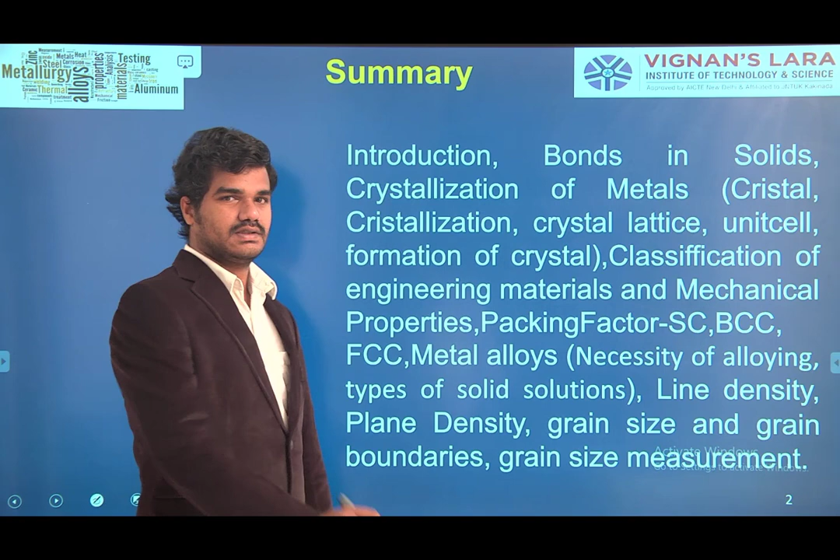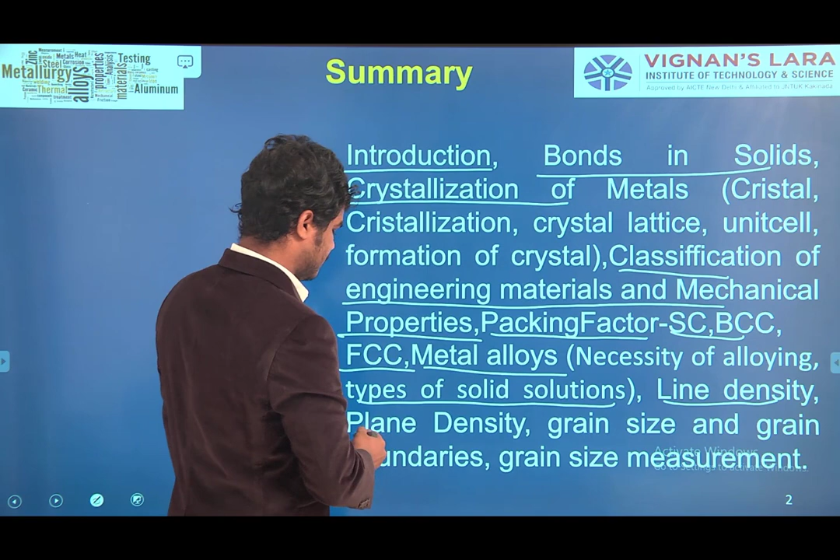So far we have covered these topics in this subject: introduction, bonds in solids, crystallization, classification of engineering materials and mechanical properties, packing factor for simple cubic, body centered cubic, face centered cubic and HCP, metal alloys and necessity of alloying, types of solid solutions, line density, plane density, grain size and how to calculate grain size, and grain boundaries. So these are all the topics so far we have covered.

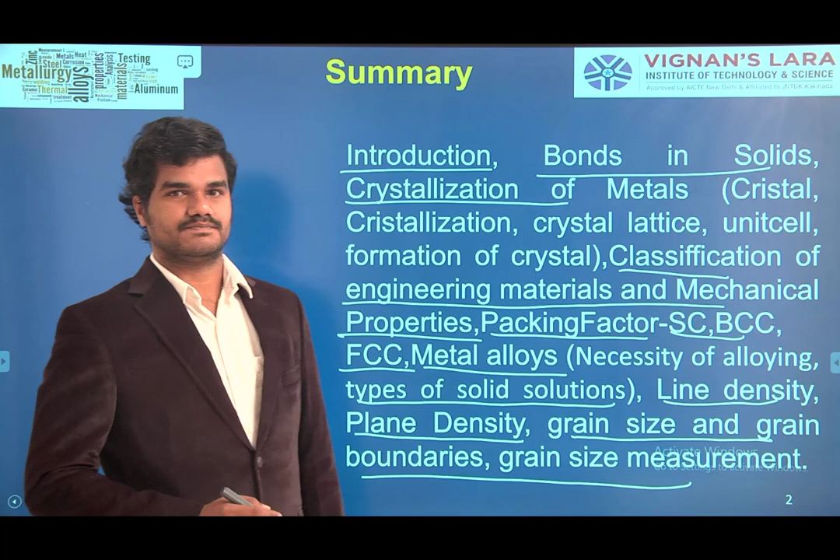Today let us discuss about imperfections, as we are in the first unit, structure of metals and constitution of alloys.

Before discussing imperfections, we have to recall the topics we discussed earlier, that is solidification and how the crystal formation happens. During the crystallization topic presentation, I told how the crystal formation happens. It forms in 3 steps: one is saturation, second is nuclei formation, and nuclei growth, leading to crystal growth. So in these 3 steps, crystal formation happens.

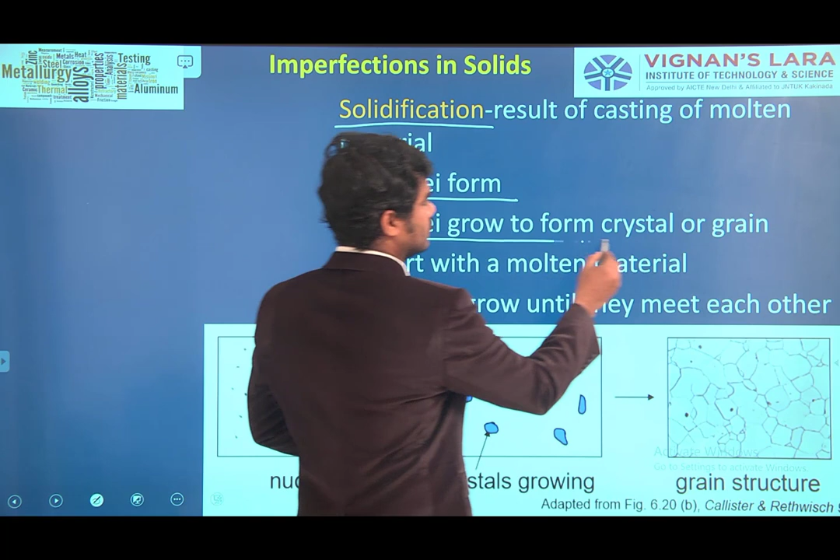During solidification, many aspects and things will happen. As I told, nuclei formation will happen, and nuclei growth to form crystal or grain will happen. So for the formation of any metal, solidification is must and should. Solidification means bringing the molten material into the solid state by cooling, by applying different environmental conditions.

During the solidification process, formation of crystal growth and arrangement of atoms happens, and because of all these factors, there will be some voids. There will be some defects in the metal. Discussing about those voids or defects, how they form, how many types of defects are there - that is nothing but the topic of imperfections.

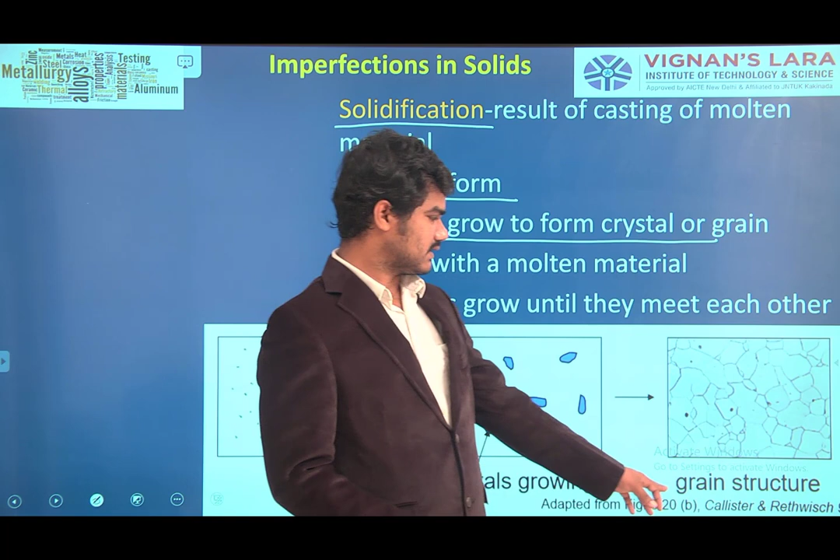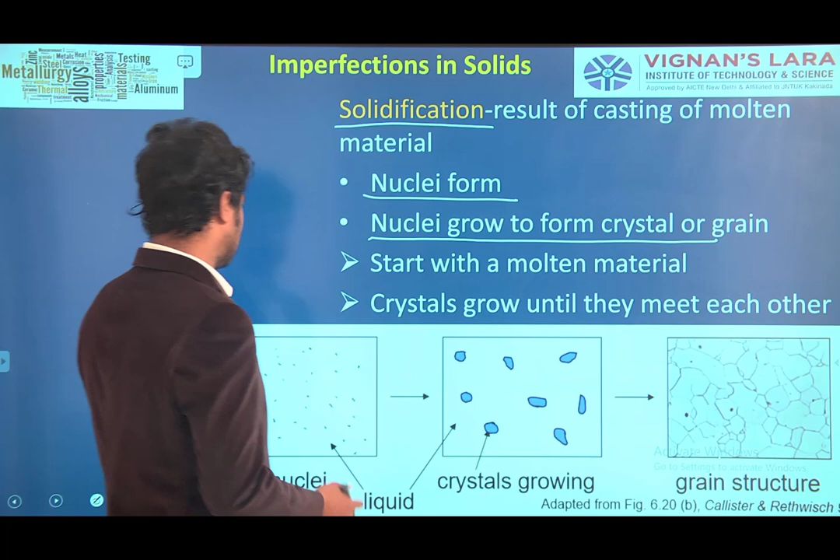As I told, crystal growth will happen through nuclei formation, crystal growing and grain structure. In the last presentation I told you that crystal growth and crystal grain structure can be seen in a microscopic structure. This is one microscopic picture of some metal. I am just recalling the topics we already discussed. Crystal formation happens in 3 steps: one is saturation, nuclei formation, and crystal growth.

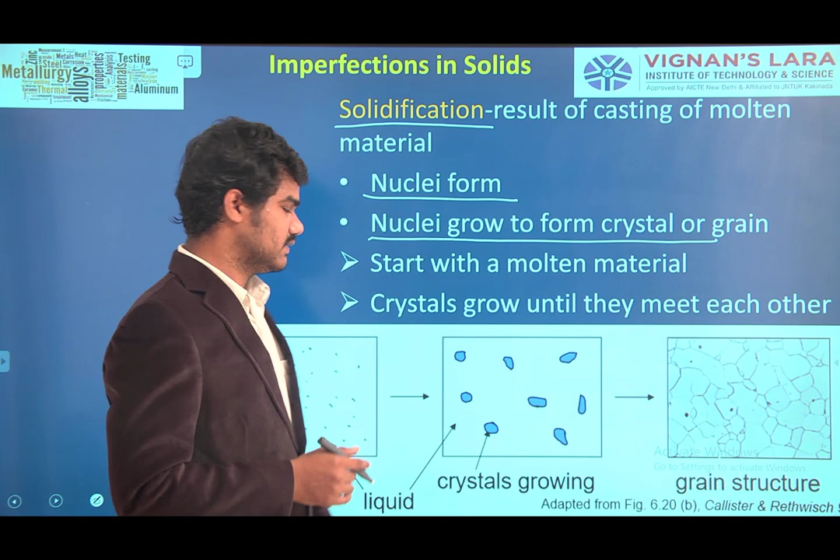Once this crystal growth happens, the grains - crystals are nothing but grains - grain formation will happen and grain boundaries will be there. So those grains which are formed during solidification are of 2 types. One is grains can be equiaxed, meaning roughly same size in all directions.

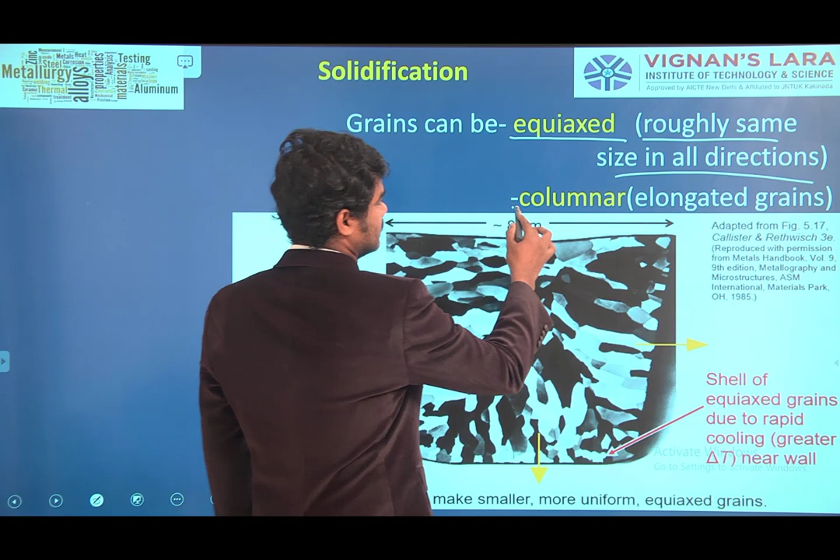During solidification, crystal formation or grain formation is happening, but the grains need not be in the same size and shape. So some grains are in the same size - the grains which are in same size come under equiaxed grains. The second type is columnar grains, or elongated grains. So during solidification, some grains are elongated, and those grains come under columnar grains.

In one picture, all these representations happen. This picture shows solidification, where some materials adding will be there, but that we are not discussing here. So this is one picture that represents, after solidification, the different types of crystal which are equiaxed and which are columnar.

Now about heat flow. During solidification, heat will release from the molten metal or molten material, which is in a very hot state, when it becomes complete metal. Molten means it is in liquid state - for example, if you have gold and want to make it into an ornament, first you have to melt it. So for every metal it is the same case. When it is in molten state, which is very hot, heat will release from the molten material. So that's what heat flow means.

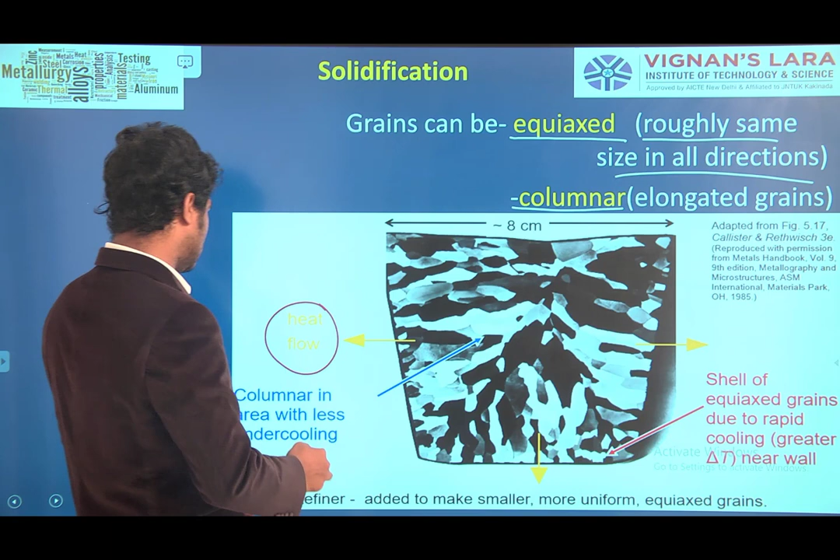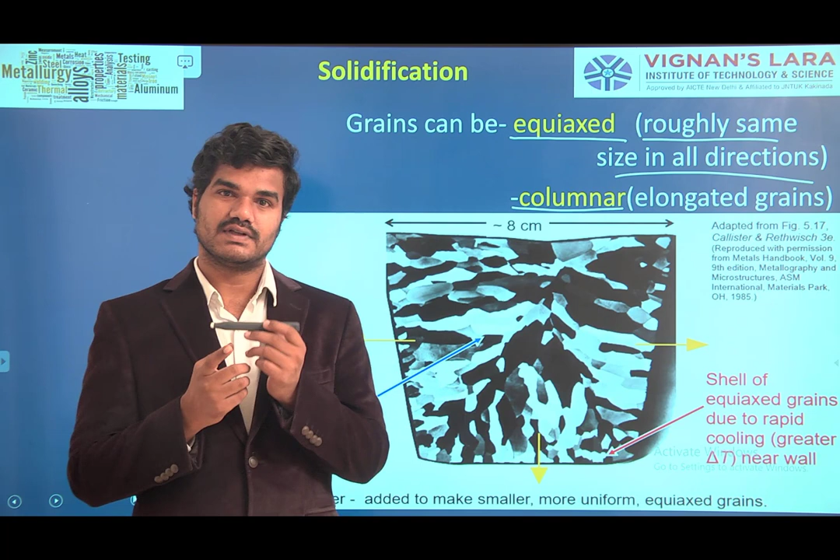Heat flow. Columnar grains form in the area with less undercooling. Suppose this is a body, a molten material, where the rate of cooling is very less at the center of the body. In the surrounding of the molten material, it will be in contact with the atmosphere, so rate of cooling is more at the edges and surface. But inside, at the center of the material, rate of cooling is very less. At that area, columnar grain formation happens.

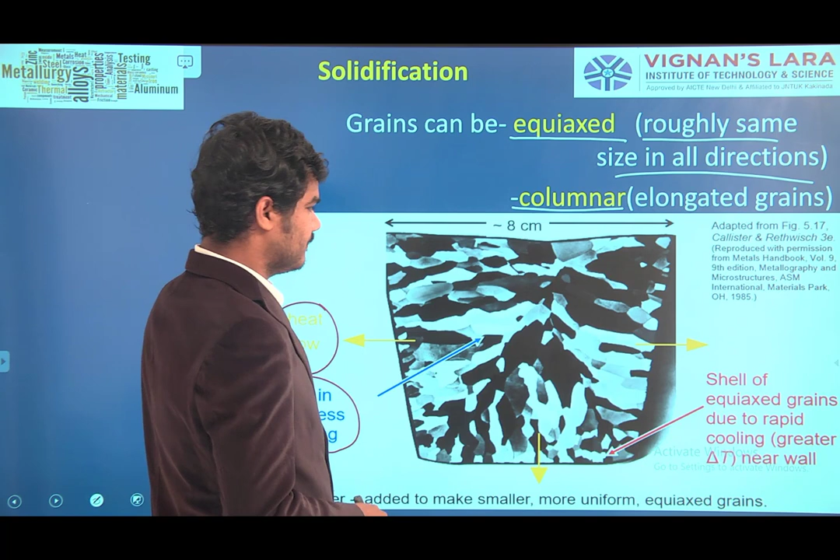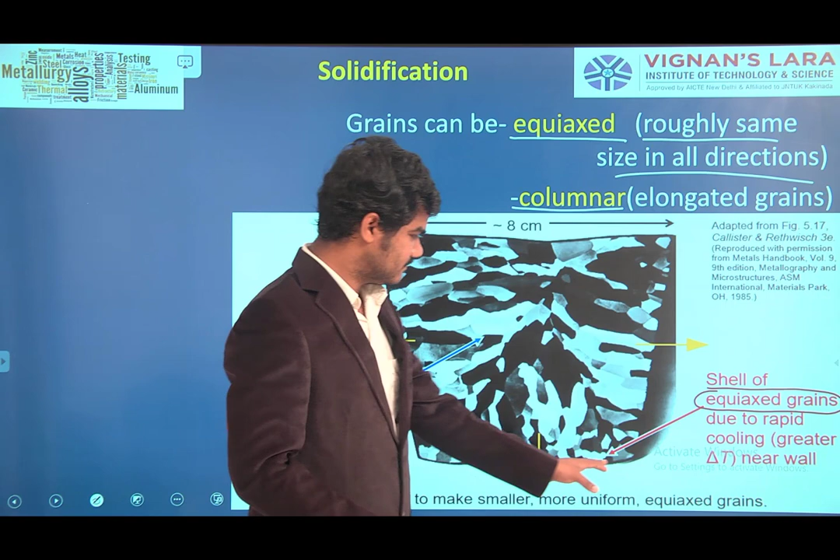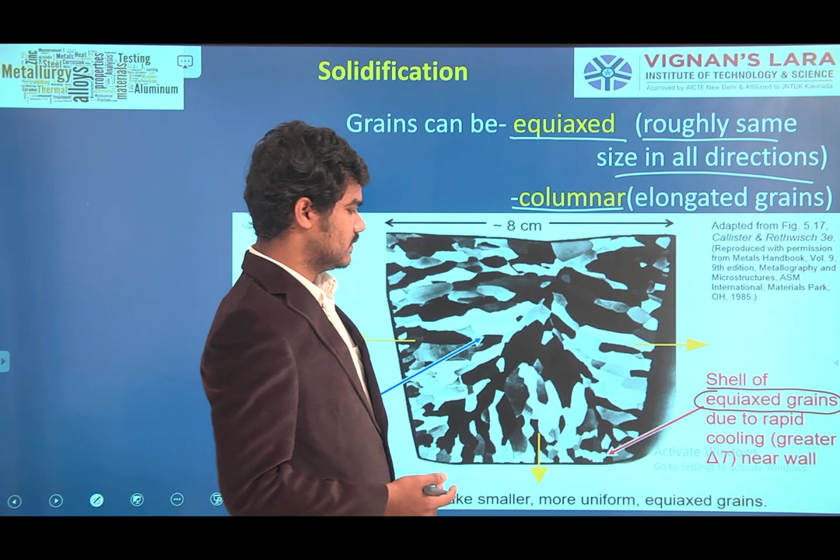Columnar grain formation happens. Where do equiaxed grains form? Equiaxed grains which are of the same size form where rapid cooling takes place. Where does rapid cooling take place? At the edges, at the edges or on the surface. At the surface, rapid cooling takes place, so where rapid cooling takes place, equiaxed grains will form.

During solidification, two types of grains will be formed: equiaxed and columnar grains. Equiaxed grains form where rate of cooling is more, meaning at the surface or edges of the molten material. Columnar grains form where rate of cooling is very less, that means at the center or inside the material, which is not in contact with the atmosphere.

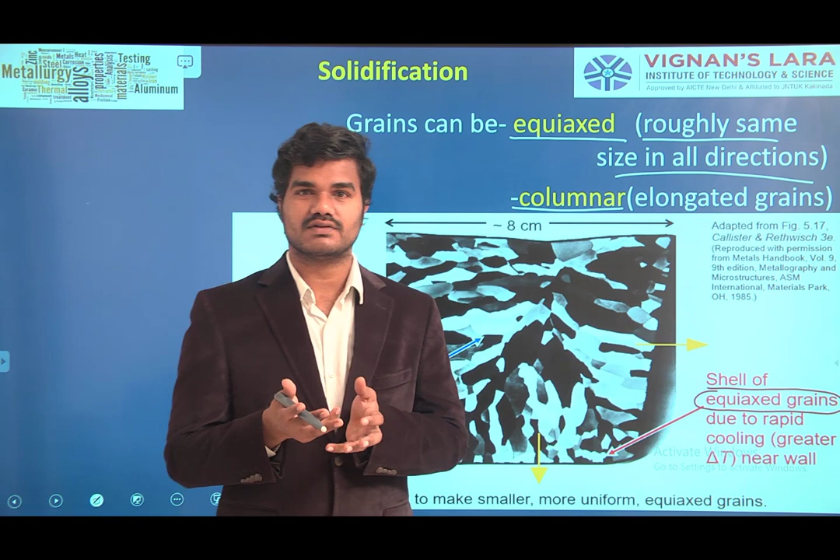In the topic of imperfections, why are we discussing all this about grains? Due to the formation and arrangement of grains, these imperfections will be formed. For that purpose, we are discussing the grains topic here also. Let us go into the next slide.

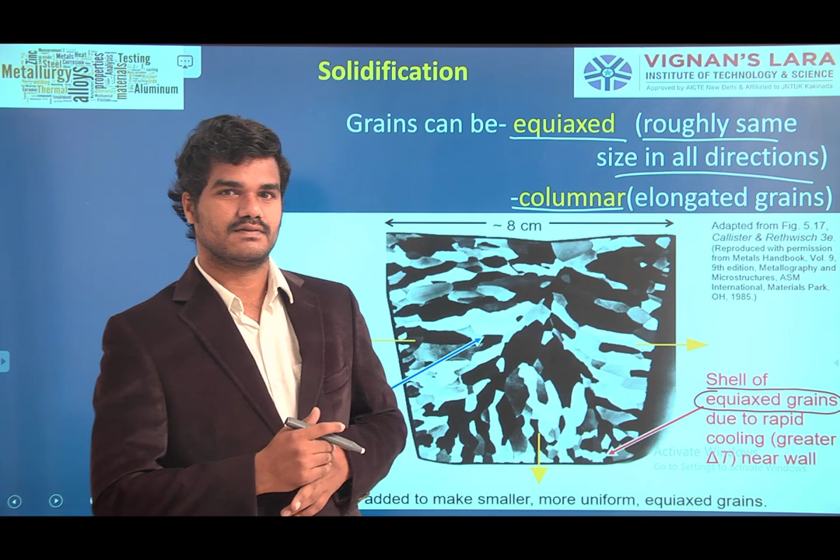Imperfections in solids. Imperfections will be there not only in solids, in metals, but in polymers, ceramics, everywhere imperfections will be formed. But here our concept of discussion is about metals, solids, metal solids.

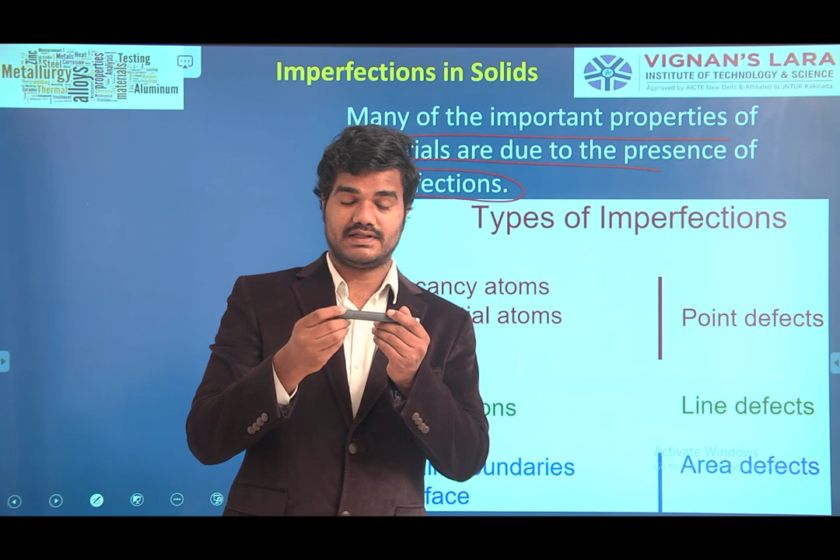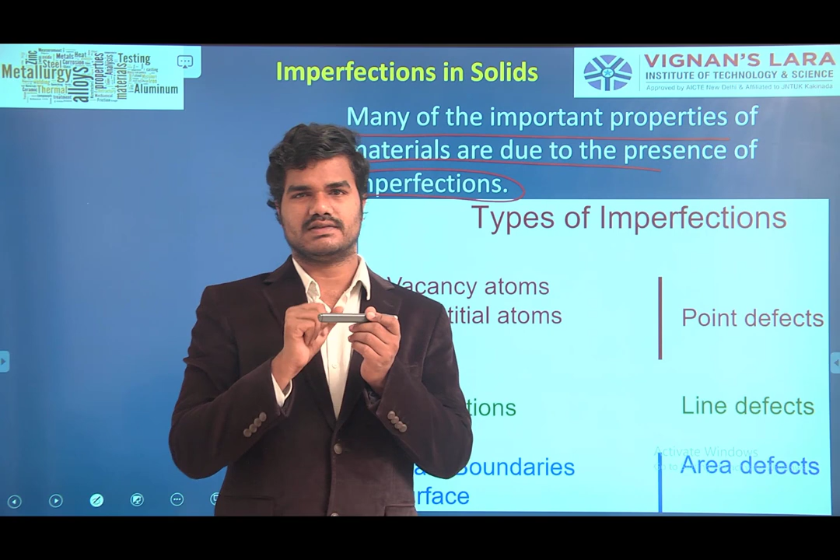Many of the important properties of the material are due to the presence of imperfections. If a particular material has high strength, those imperfections are less. So if the imperfections are very less, strength and some other properties are more. So many properties depend on these imperfections inside.

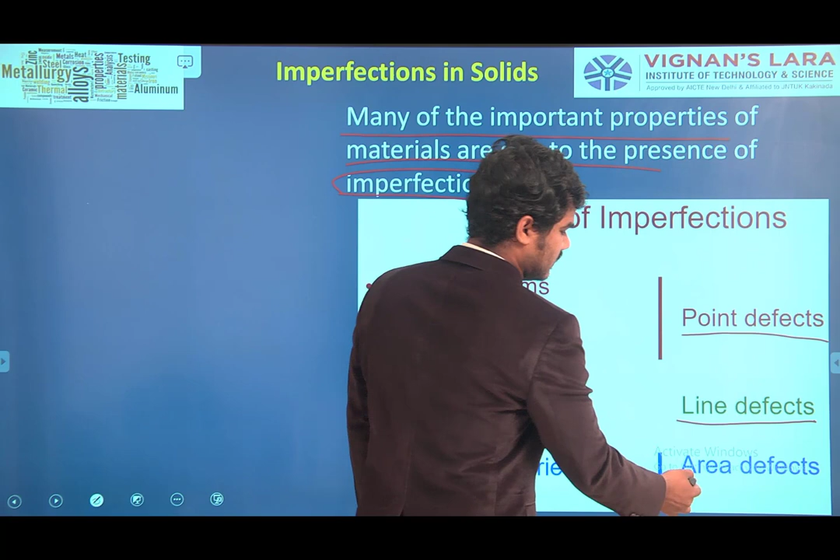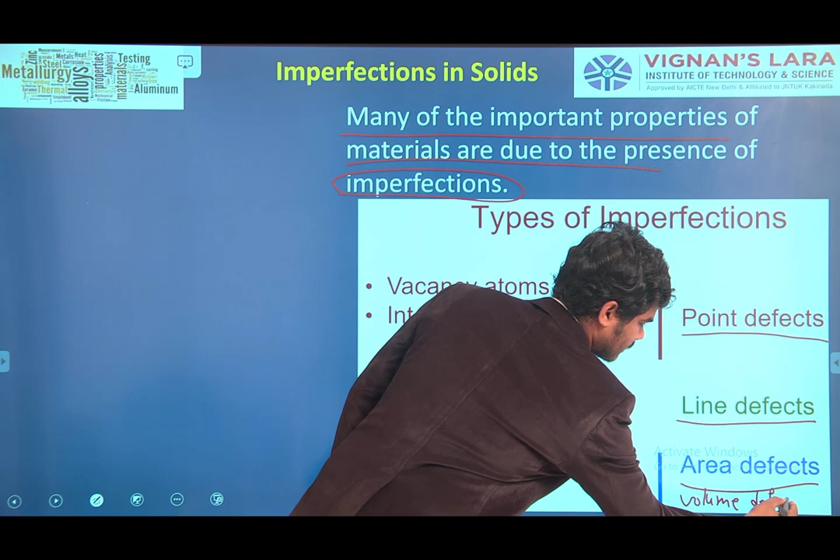Let us see what imperfections are. Those imperfections are classified into 4 types. Imperfections are also nothing but defects. Those defects are classified into point defects, line defects, and area defects. Point defects, line defects, area defects, and volume defects also there, which is not shown here. Volume defects also there. Let us discuss in detail about these defects.

What are point defects? What are line defects? What are area or planar defects? What are volume defects? How do these form? How are they again classified?

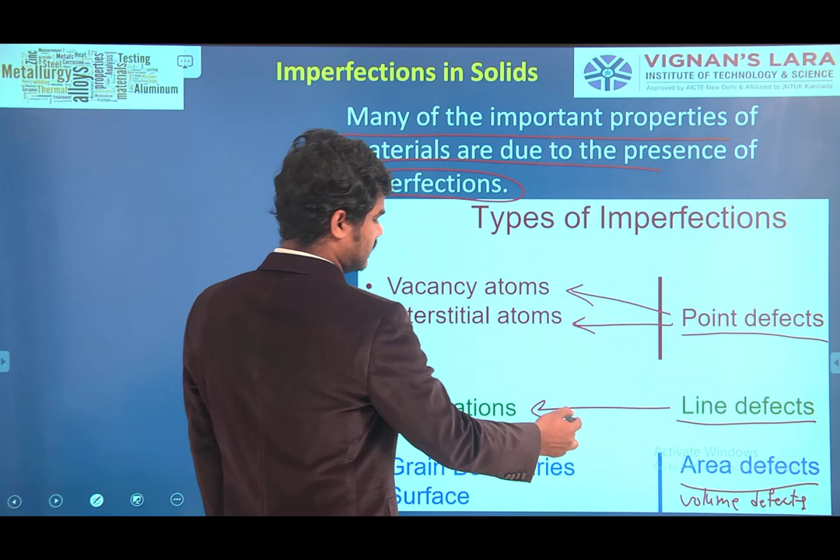Point defects are classified into 2 types. One is vacancy atoms - point defects form due to vacancy of atoms. Point defects may also form because of interstitial atoms. So in 2 ways point defects will form. Whereas line defects will form due to dislocations. Let us discuss more about what is vacancy, what is interstitial, what is dislocations.

Area defects or planar defects are caused because of grain boundaries and surface or planar area. Area defects are classified into grain boundary and surface. Line defects are classified because of dislocations, and again these dislocations have some types, which we will see in the next slides.

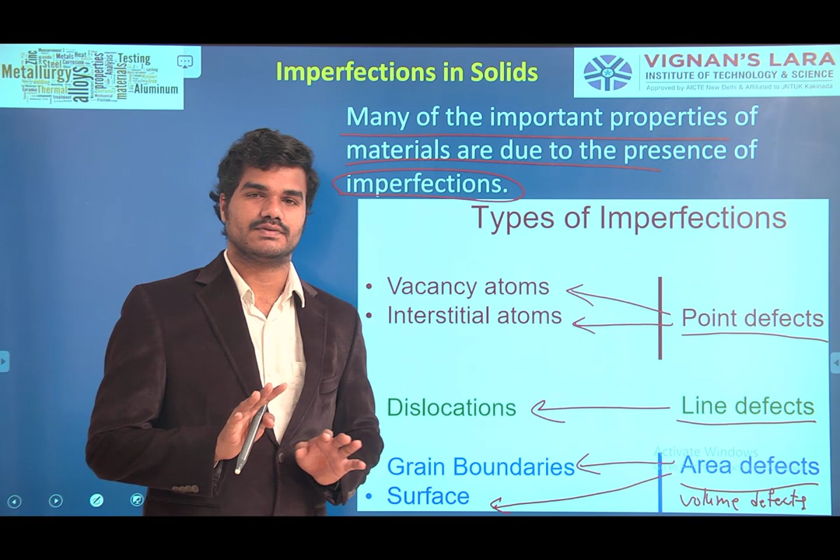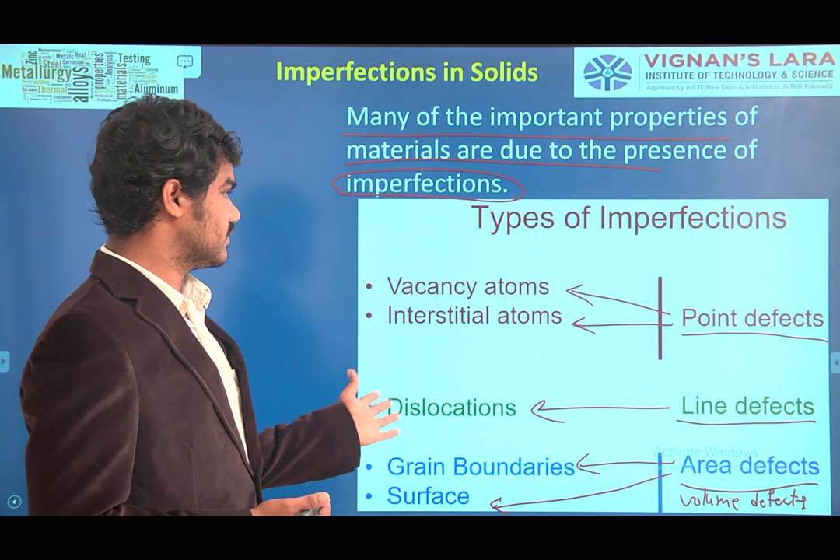Point defects are due to vacancy of atoms and interstitial atoms. In this slide, imperfections are simply classified into 4 types: point defects, line defects, planar defects, and volume defects. Point defects are due to vacancy atoms and interstitial atoms. Line defects are because of dislocations. Area defects are because of grain boundaries and surface, and then volume defects. Let us discuss further in detail about these defects.

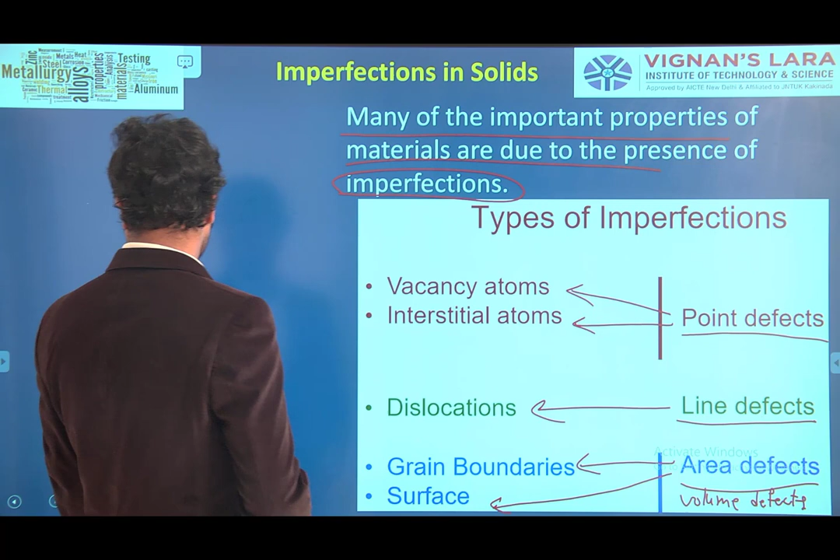Point defects in metals. What is the first one? Point defects caused due to vacancies. What is vacancy? You normally say the seat is vacant, meaning there is space. It tells about the space. So during the solidification process, in the arrangement of crystals and grains, atoms will be there. During that arrangement, there will be some gaps, some vacancies will be there in the atoms.

In every grain, every crystal, the arrangement of atoms will be there. Those atoms are arranged in a proper manner, maybe body-centered cubic lattice, face-centered cubic lattice, or simple cubic lattice. Different forms we have discussed already. During that arrangement, some vacancies will be there after arrangement of atoms.

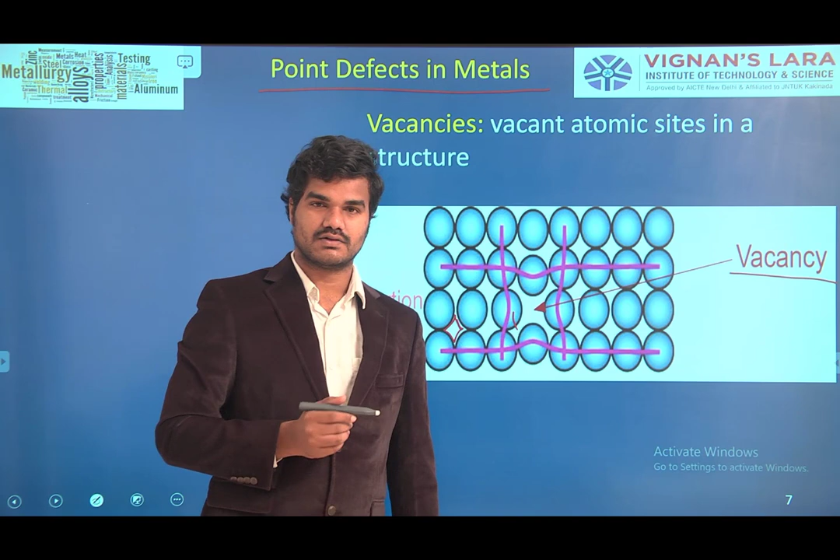Let us see in this diagram. Here, this is one type of arrangement of atoms, whereas in this part you can identify some gap, some vacancy is there. When compared to the entire arrangement, here the space is not filled by any atom. So due to this vacancy, a defect will be there in the material. It is a point defect.

Self-interstitial. Interstitial defects I told, na? What is self-interstitial? Extra interstitial term we already discussed in the types of solutions. Just recall: interstitial, substitutional, interstitial solid solutions.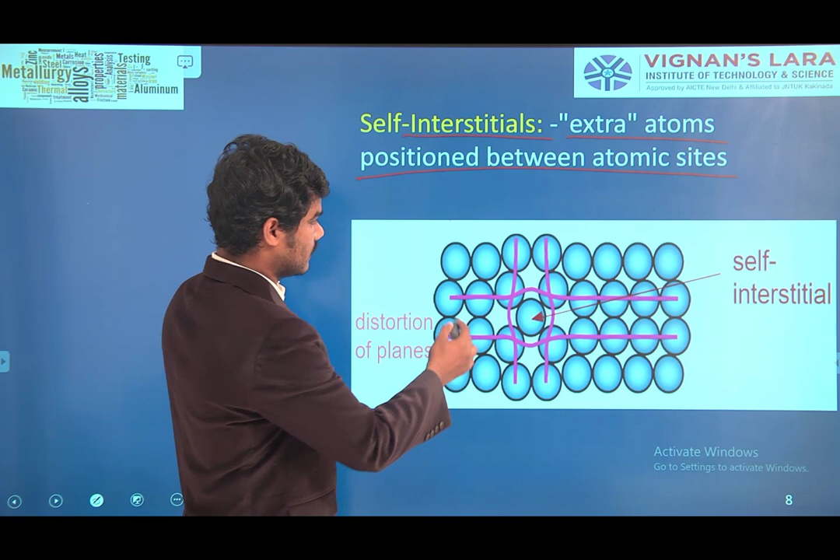Self-interstitial: extra atoms positioned between atomic sites. So this is another arrangement of atoms, whereas in the previous arrangement, between the atoms some gap is there, vacancy is there, and that is due to vacancies, point defect formation. Here, an extra atom occupied that place.

Here, proper arrangement up to this area, but here in the middle portion, this self-interstitial atom changes this entire pattern. So this occupies a separate space instead of the proper order. This kind of defect formed in the material due to occupation of atoms is called self-interstitial. This is one type of point defect, right?

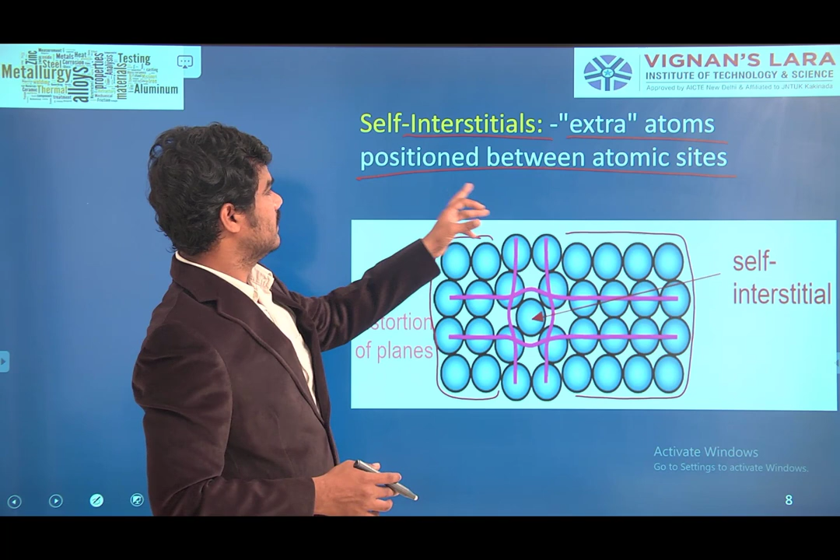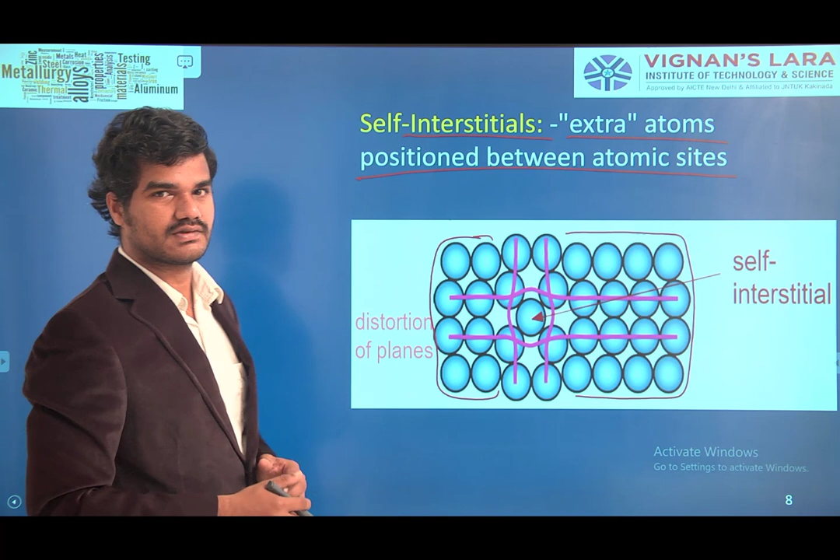Distortion of planes happens because of this. If this atom is not there, this would be a straight line, and this is also a straight line. So because of this single self-interstitial atom, this arrangement is disturbed. Some void formation, some gap formation will be there, so some property changes will occur. This kind of defect formed due to extra atoms, arrangement of extra atoms, is called self-interstitial, which is nothing but a point defect. Hope you understand.

Let us discuss more. Just now I told you we have discussed different types of solutions, na? Solid solution, self-interstitial, substitial. Substitial means if one material, the base material, and another material are combined by bringing into a molten state, and the atoms of this material and atoms of the second material are of the same size.

So that is substitial. Right? Substitial or interstitial, you just recall. So one type of mixing is if atoms of the parent material and atoms of the adding material are of the same size, that is substitial. If atoms are of one size and the adding material is of very small size, that is interstitial. Interstitial, substitial, a little doubt is there. You please clarify from the previous presentations.

So let us take the same example here. These atoms, this arrangement, let us take a solid solution of B in A. Let this orange colored one be B, a solid solution. You are adding that B material into A material. So during this arrangement, what will happen? This arrangement is proper, but during this arrangement there may be some gaps, vacancies. Those are point defects.

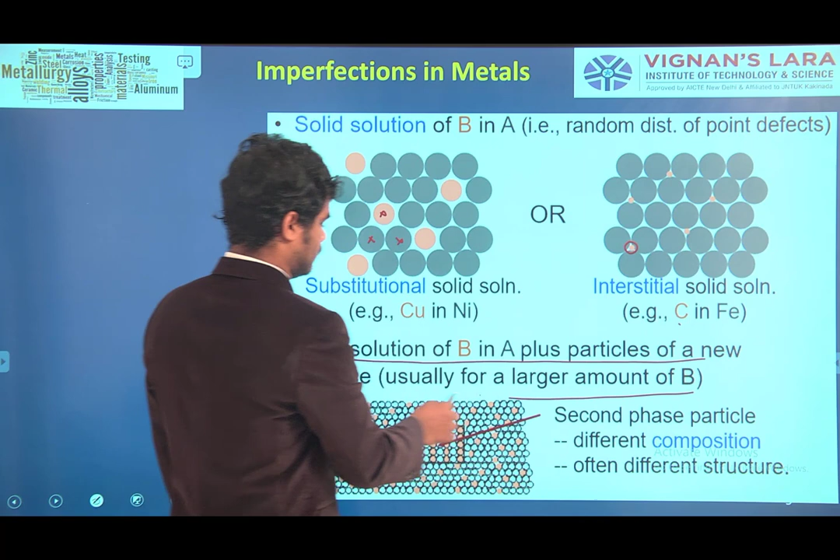When vacancy formation or self-interstitial atom occupation happens because of mixing of two materials in the molten state, mixing B in A or A in B, vacancy formation and point defects formation will happen. That leads to increase or decrease in properties of the material.

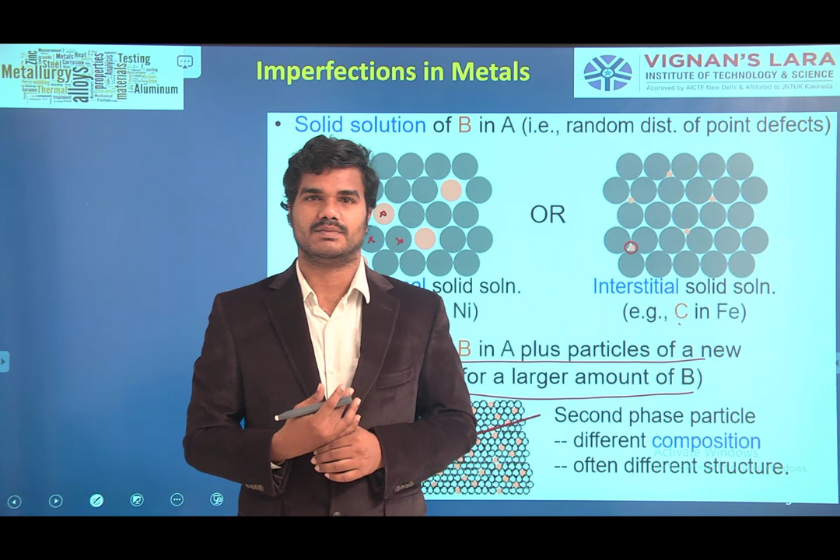That is about point defects. Next we will discuss line defects. Slip between crystal planes result when dislocations move. We will also discuss slip today, but let us not think about slip now. We will discuss it in the coming slides.

Now in line defects, the most important term we have to discuss is dislocations. Line defects are due to dislocation of atoms - one-dimensional defects around which atoms are misaligned. So vacancy formation and extra occupancy of atoms also happen due to dislocation of atoms.

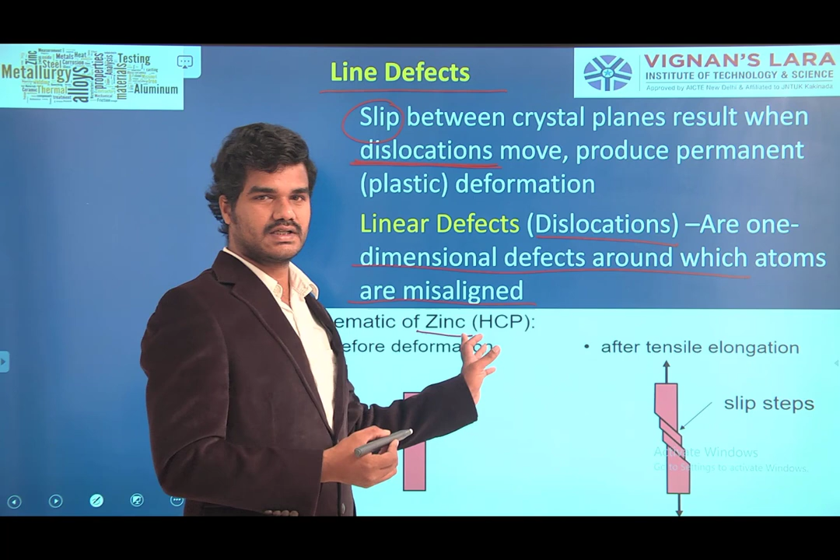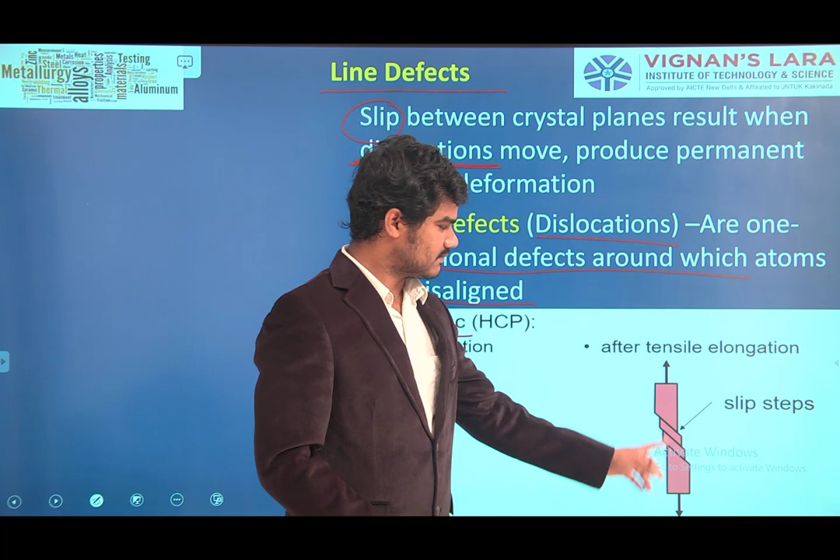So in this HCP structure, before deformation, this is a rod - let us take that as a zinc rod. If you apply some tensile load on the zinc rod, what will happen? Some elongation will start once you apply some ultimate load. That elongation, how does it start?

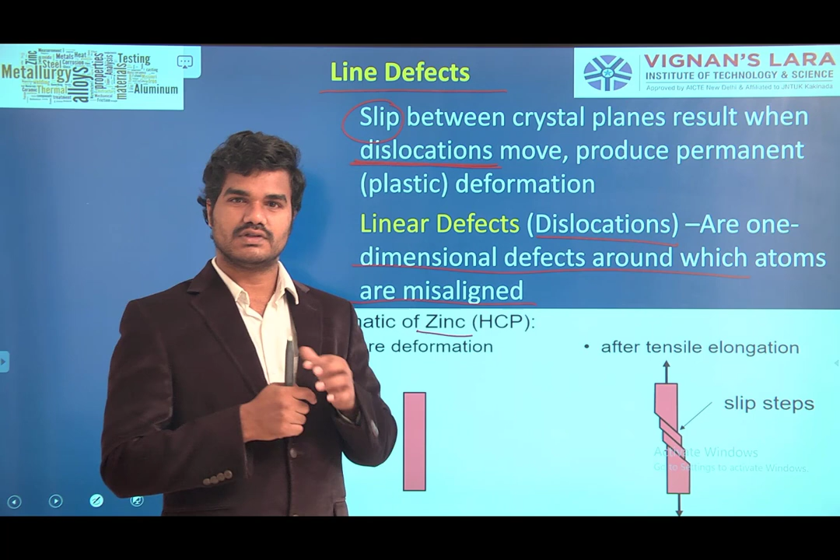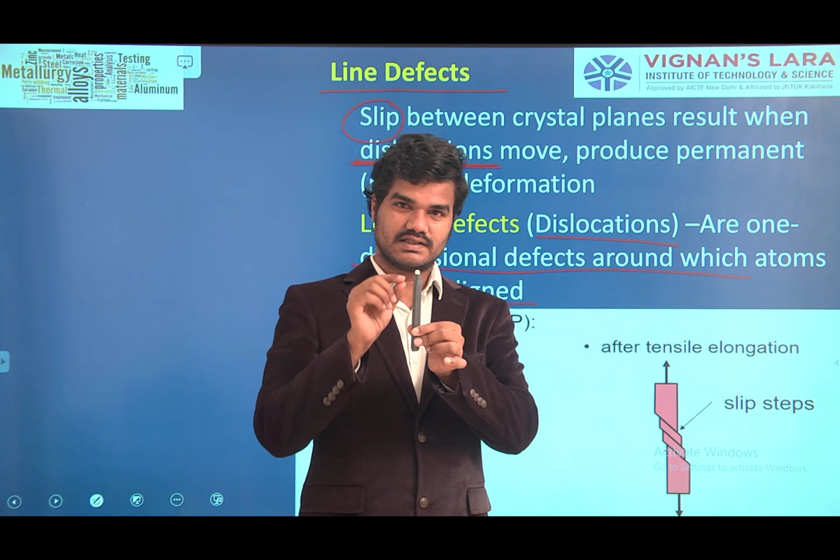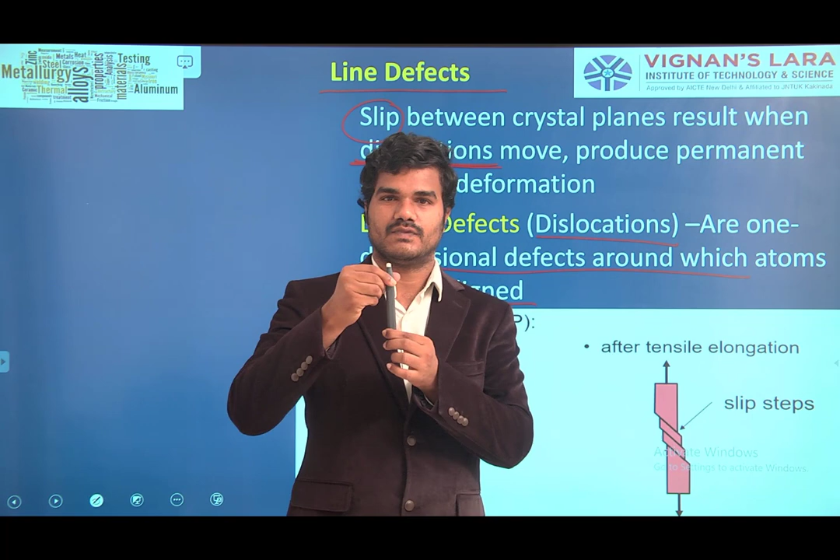Due to dislocation of atoms inside the material. If this is your zinc rod, inside crystals are there, and inside the crystals atoms are there. Those atoms have some arrangement, na? So when you apply tensile load, in between the atom arrangement, some disturbance will cause dislocation to happen. Due to the dislocation, elongation will start.

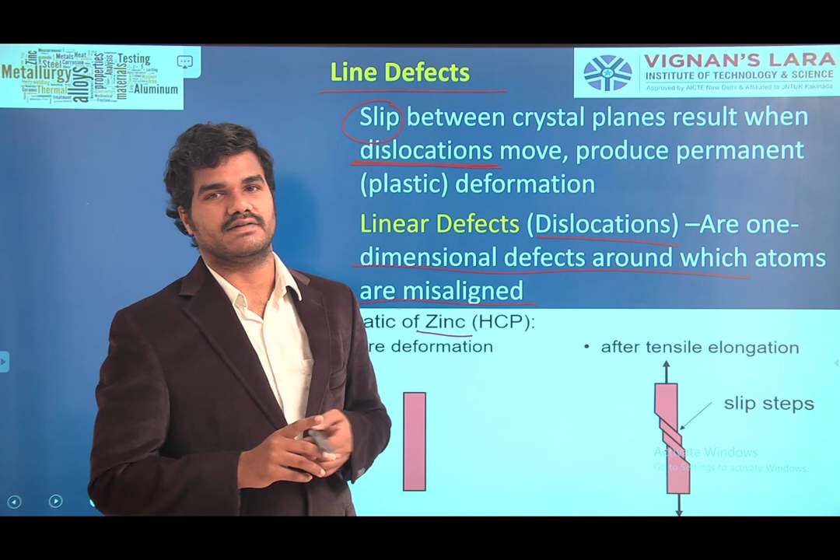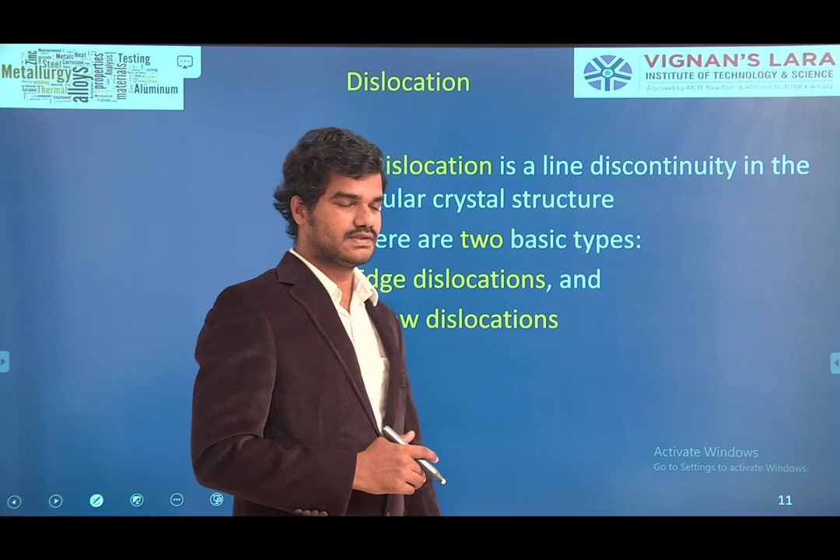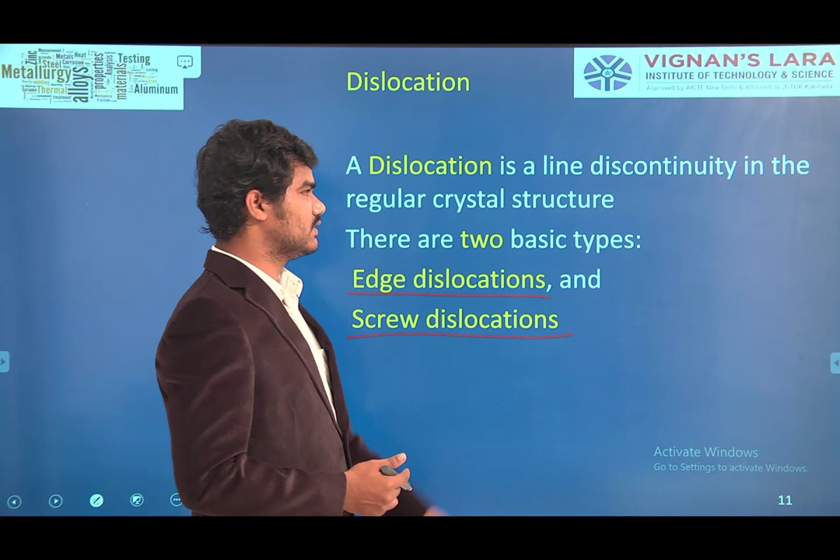So that type of defect comes under line defects. Let us discuss further about dislocations. Dislocations are of two types: one is edge dislocation and the second one is screw dislocation. Let us discuss what is edge dislocation, what is screw dislocation.

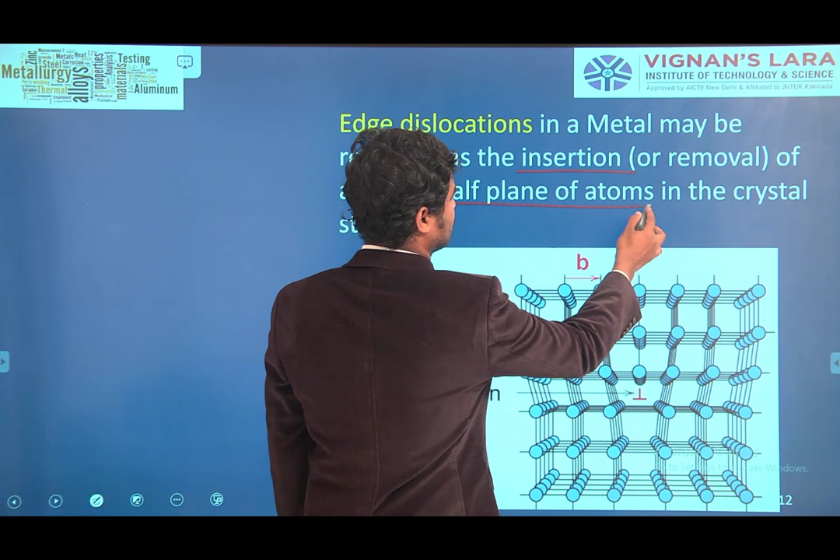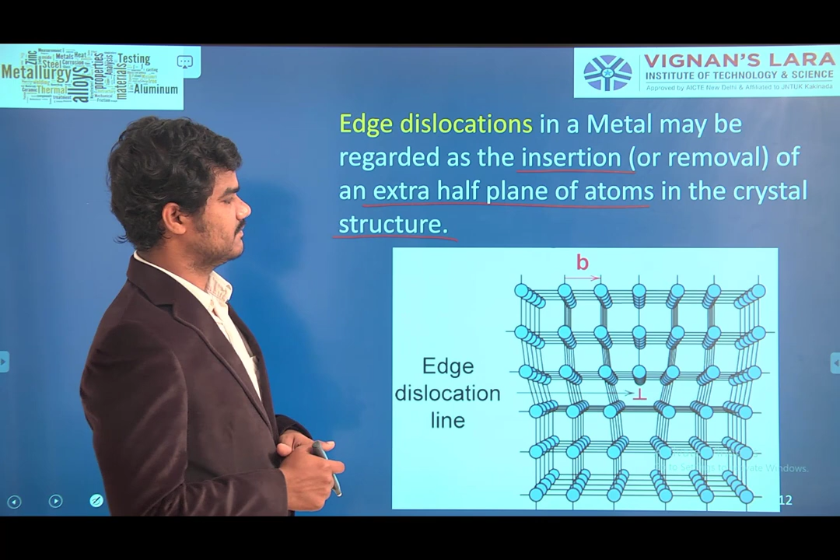Edge dislocation in a metal may be regarded as the insertion or removal of an extra half plane of atoms in the crystal structure. What is edge dislocation? Insertion or removal of extra half plane of atoms.

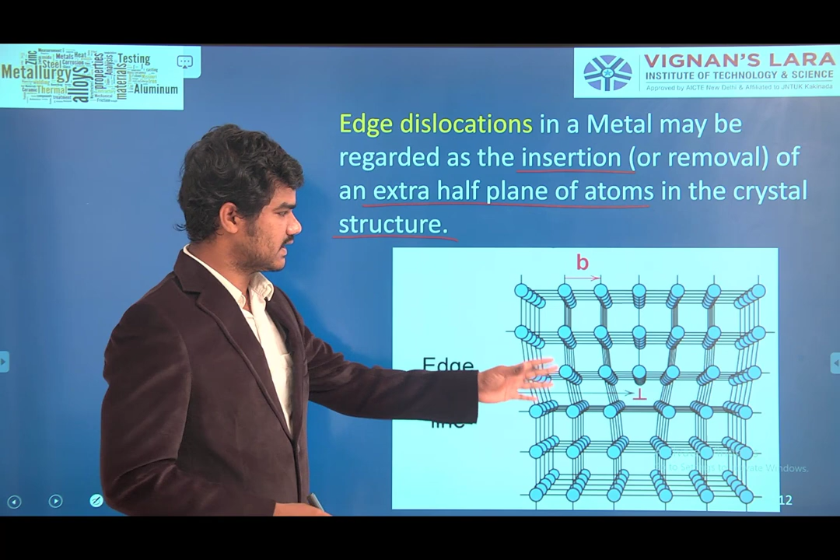Edge dislocation, this is one diagram. If you take this line of atoms arrangement, it is in a proper way from here to here. The distance arrangement is all okay. But if you see here, this atom arrangement is okay, but from that point there is no atom arrangement - removal of plane happens, removal of atoms happens. Because of that, some disturbance is there, dislocation of atoms is there. So this type of dislocation is edge dislocation.

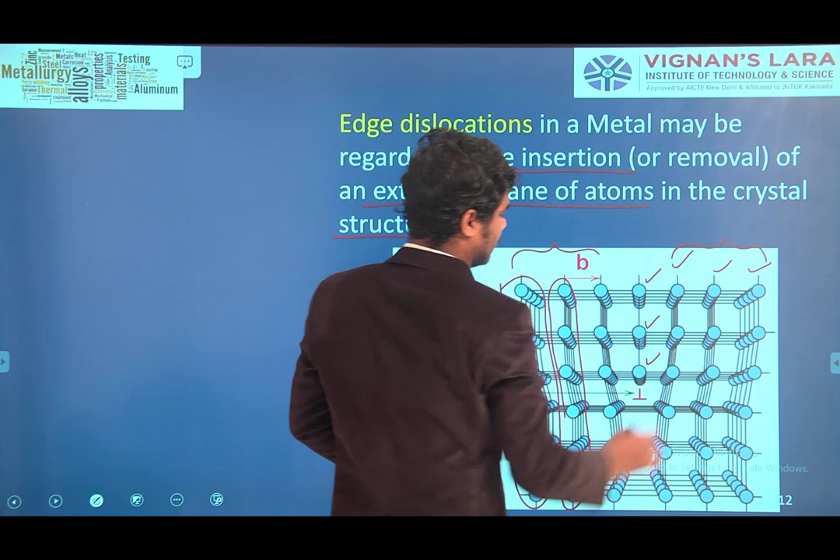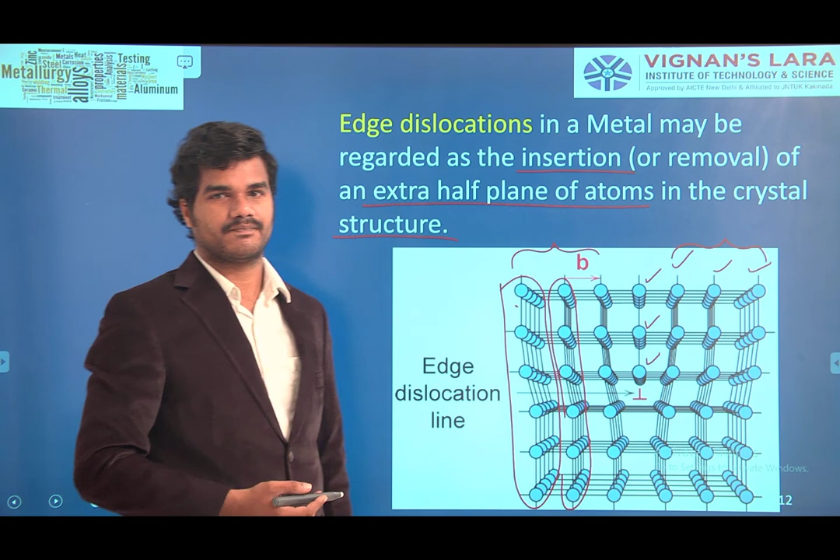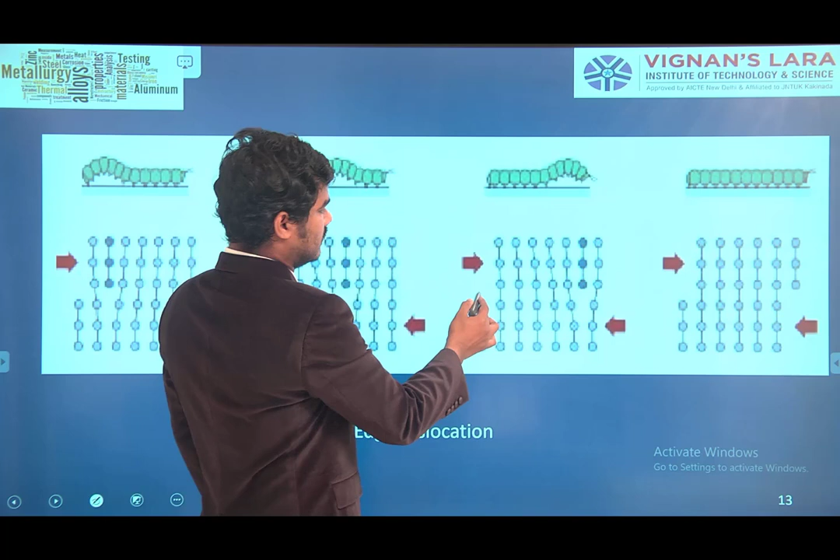Example of edge dislocation: you can show remaining rows are all okay, but this row - if you take here, only 3 atoms are there, remaining 3 are not there. So this type of dislocation is edge dislocation. Some other examples here - these all are okay, but here it is not there. This is one edge dislocation.